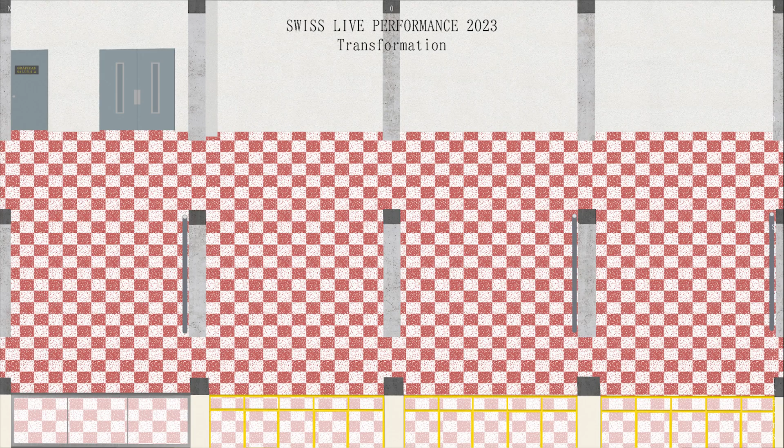We have divided the presentation into four themes. The first one being geometry and experience. This is a drawing of the former printing house that we transformed into a living space in our offices in Madrid, called La Nave.

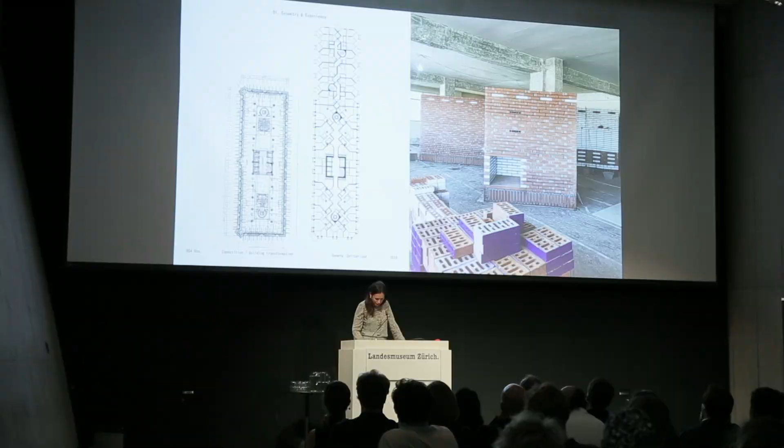A basic and repetitive structure of concrete slabs and pillars in a 25 by 10 meter dimension. The floor plan escapes any typological definition. It results from the search for new spatialities required by existing constraints. The need to implement a certain domestic hierarchy and to distribute natural light evenly into the different programs drove us to insert an alternative geometry into the existing floor plan: diagonals. This strategy was originally tested in a proposal for a competition we did in 2018.

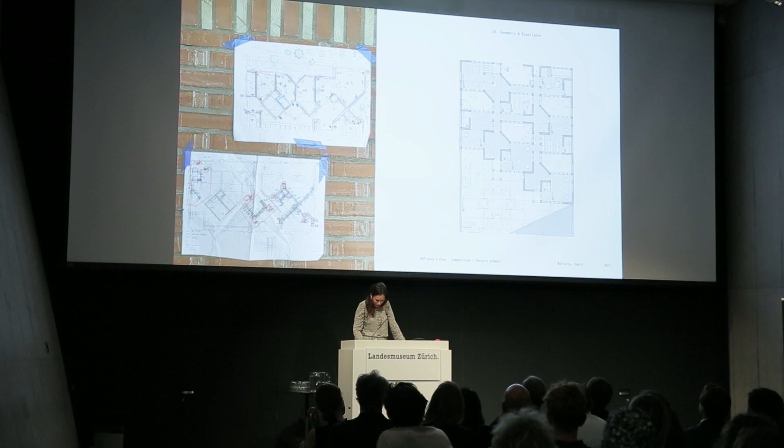The potential conflict between the given space and the desired functions allows the discovery of non-expected spaces. This is what we like to call found spaces, devised to support activities that are undefined but expected. El Garaje, a former car workshop in Madrid, offers the transformation of an industrial ground floor into a 150 square meter apartment for a family.

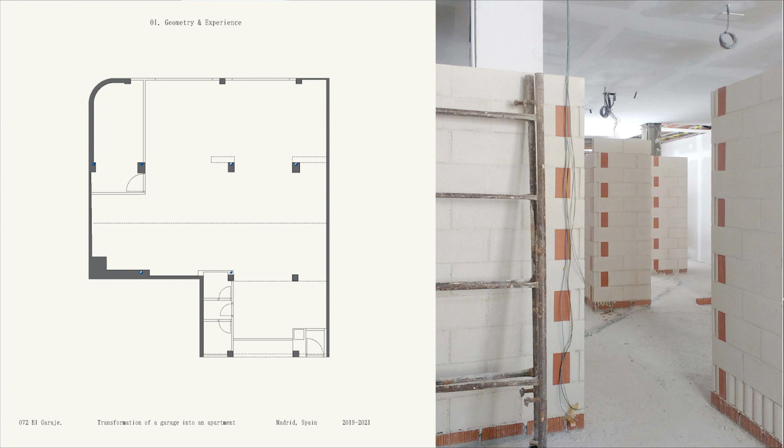Diagonal was again a strategy, but implemented differently this time, using a succession of rooms creating new perspective. In El Garaje transformation project in Madrid, the proportion of the spaces is directly related to the concrete block sizes. The result is an orderly labyrinth conducive to a way of co-living where household members can be autonomous, where the family doesn't need to be gathered in the same space or doing the same thing in order to be together.

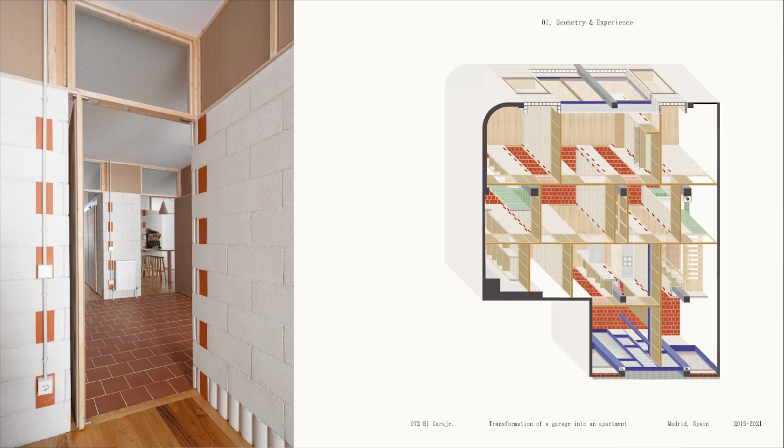Vale Pereiro is a former office building transformed into 13 apartments in the center of Lisbon. This time, the depth of the building was not an issue for turning former offices into domestic space. The existing ceiling height, on the other hand, seemed a bit difficult and became the starting point of the project.

We decided to cut into the slabs to create double height in the living area. The sharp contrast between the low ceiling area and the double height rooms imbues the units with the spatial experience of compression and release. These new dramatic spaces allow us to balance the relation to the ceiling and bring a new vertical perspective to the outside. Space of opportunity.

Spaces of opportunities are what we call the informal and not obvious found spaces in transformation that hold hidden and unexpected qualities.

In La Nave, the plant-filled winter garden runs along the apartment's entire north-facing wall. It graduates the bedrooms' intimacy and nuances its light. It creates an extra space and offers an alternative circulation and a climate buffer at the same time. It is connected to the inner area of the home by 12 doors.

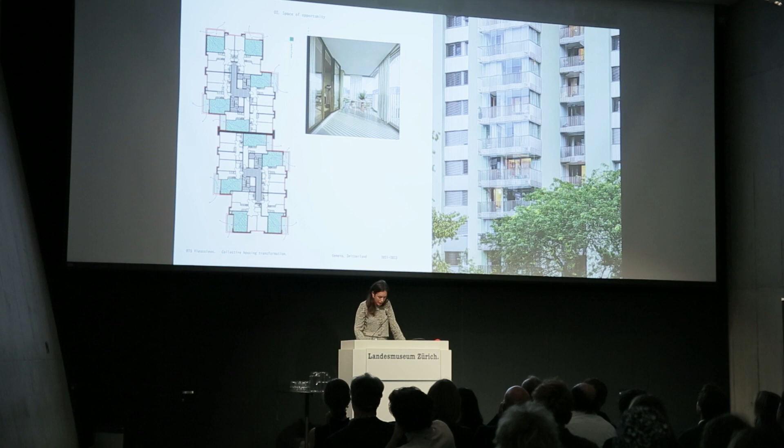Here we are back in Geneva for the renovation of the thermal facade of a 15-story high apartment building. What seemed to be only an environmental upgrade brought the opportunity to offer a new room to all the residents with the creation of a winter garden. We propose spaces that transition between the interior and the exterior, in-between spaces that contribute technically and spatially to the comfort and pleasure of living there.

Back to Vale Pereiro, the apartments on the ground floor are distanced from the street hustle with a winter garden, allowing for cross-ventilation in the apartment.

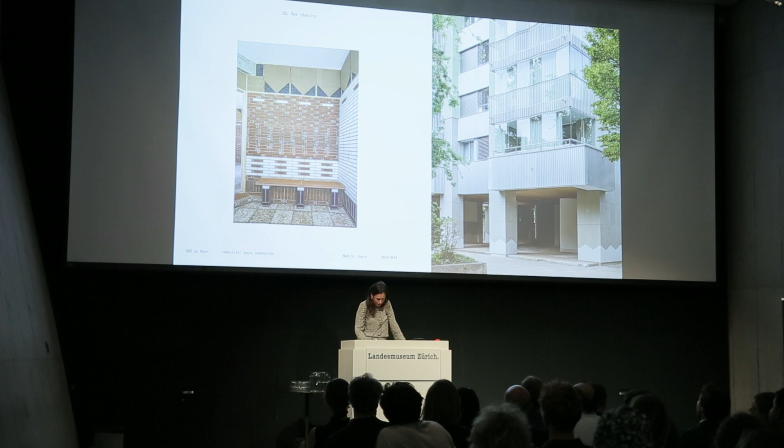New identity. The act of transformation is, of course, a way to rejuvenate obsolete or even sometimes abandoned structures. From a simple and pragmatic point of view, it is a chance to reuse and operate again a space or a building. But we believe it's also much more: it's the opportunity to give a new identity, a new address, a new character.

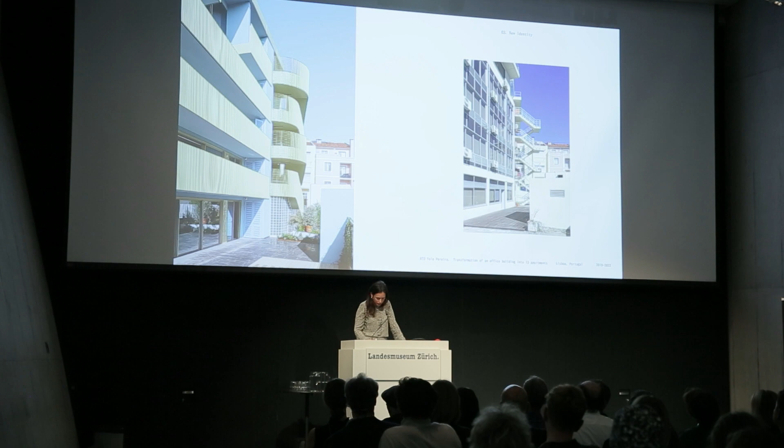The former back of this 80s office building in Rua do Vale Pereiro in Lisbon, facing a sunny courtyard, is now a vibrant and colorful facade that offers outside terraces to its residents in dialogue with the neighbors. The front and main facade, covered now in enamel blue tiles, brings the much-needed vibration that the building needed.

Acting as a street pivot, the existing structure can be seen from both ends of the street and articulates the curve.

In all our projects, we're always attracted to push the boundaries of material diversion. What's the best use of material properties? What qualities lie in a different type of layering? Working obsessively with one element allows us to discover its inner values and use them in an atypical way.